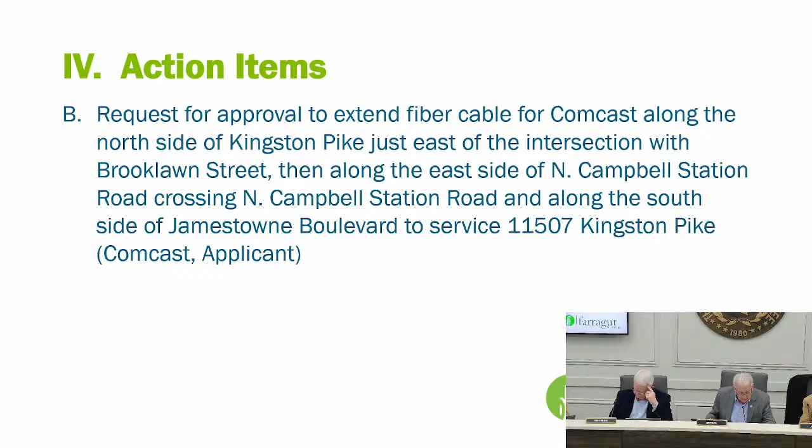Comcast applicant. Yeah, this fiber project was actually mostly approved at the June Planning Commission meeting, but Comcast wanted an additional section along Kingston Pike, and that required TDOT's approval, so they had to go through TDOT to get that section approved. That's what they're requesting tonight: to amend that original approved plan to include the section along Kingston Pike, which starts just to the east of the intersection of Kingston Pike and Brooklawn Street.

Then the fiber would be installed in a new 2-inch conduit that would be bored under Kingston Pike from Brooklawn, and then on the north side of Kingston Pike, all the way down to the eastern intersection with North Campbell Station Road. Then it'll go north along North Campbell Station Road and cross under it to the intersection with Jamestowne Boulevard, and run along 900 feet of Jamestowne Boulevard, and then into the Village Green Shopping Center to service 11507 Kingston Pike.

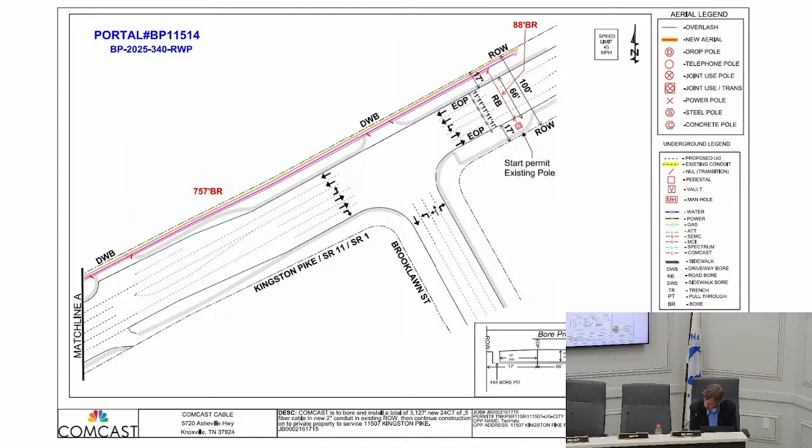The applicant has obtained approval from TDOT, and the staff is recommending approval of this fiber extension, subject to obtaining a right-of-way permit from the town's engineering department.

Okay, need a motion? Move to approve. Second.

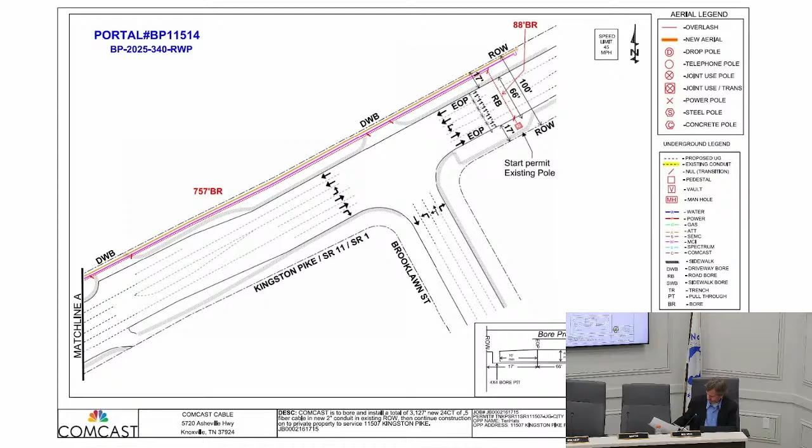All right, are there any citizens signed up for this? No, sir. Is there a representative present? Okay, any comments or questions from the commissioners? None.

I think we need to make sure that the motion has a subject to. The motion was subject to that. Okay, just want to make sure. If there's no further questions or comments, we have a motion and a second.

All in favor of the motion, say yes. Yes. Opposed?

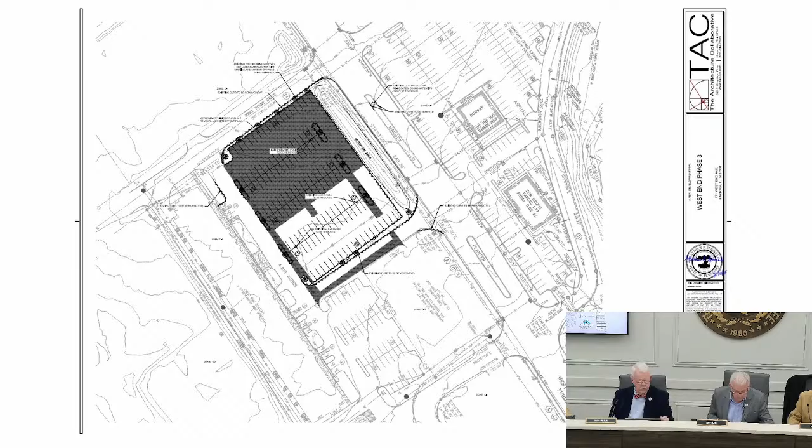This item was postponed at the November meeting. They were working on some stormwater plans. It involves a proposed 9,600 square foot building at the south intersection of West Point Drive and West End Avenue. This is the existing conditions, and the shaded area shows the parts of the parking lot that would be modified to accommodate the building and other proposed changes.

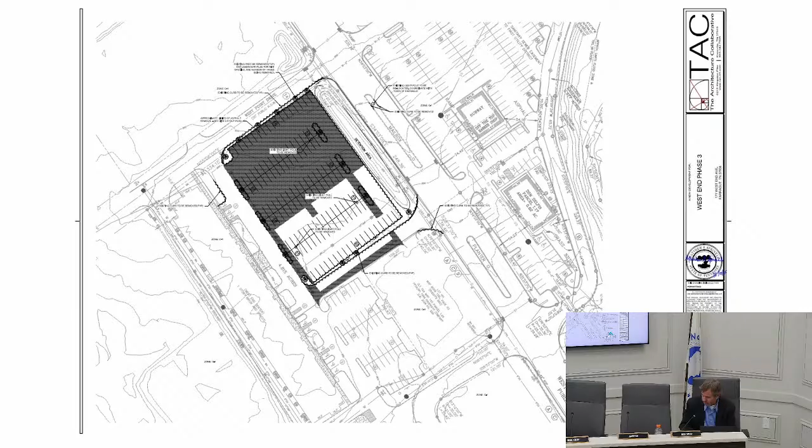There's an existing detention basin along West End Avenue, and with their current proposal, they're proposing some underground detention in that area.

The beige color is where the proposed building would be situated, up close to West Point Drive. They did not want to put the building along West End Avenue because it would block the tenants in the existing West End Center.

If you remember, when we updated our land use plan back in 2012, there were illustrations of different parts of the mixed-use town center, some concepts. One of those was for the West End Center to have what's called these liner buildings, brought up closer to the street to line it. So that's consistent with our comprehensive land use plan and helps advance that design concept.

They also have, as you all know, an amendment going through the Board of Mayor and Alderman dealing with the brick requirements, based on the standards in the architectural design standards, allowing them to average the 4 elevations with at least 75% face brick.

So the staff has reviewed this. I'm just going to show some other images here. This is an expanded view of the detention along West End Avenue.

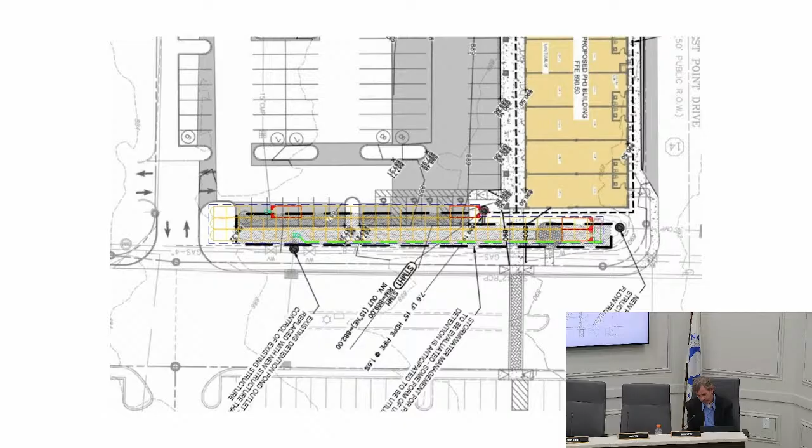The building's south elevation faces the existing West End Center, or kind of corners it. They're trying to match that architecturally, and that's one of the reasons for their original amendment to the current requirements in the zoning ordinance for face brick on all 4 elevations.

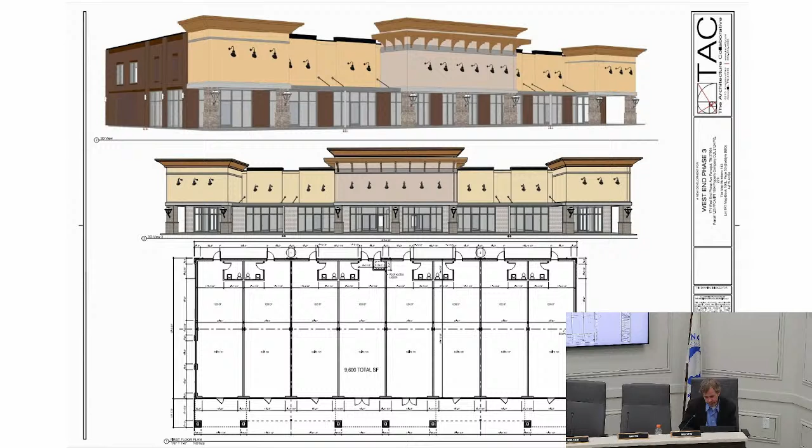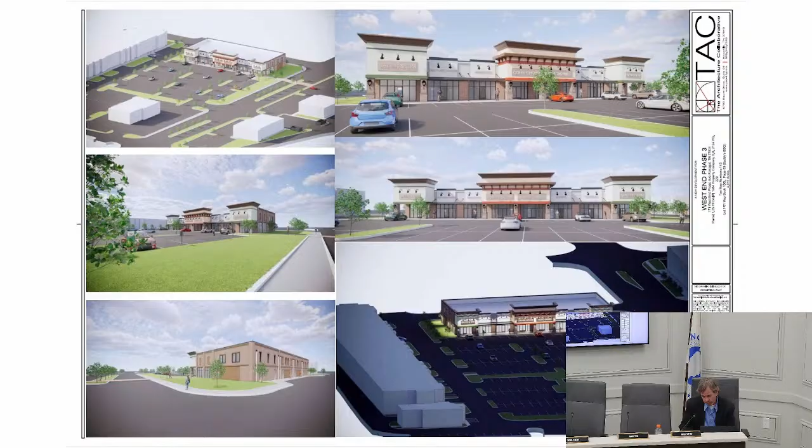So that elevation is the one that doesn't currently meet the face brick requirements, but all the other 3 elevations are almost 100% face brick. If you average the 4, as would be in the text amendment if that passes through the board, this building would be in compliance, because it averages to at least 75% face brick.

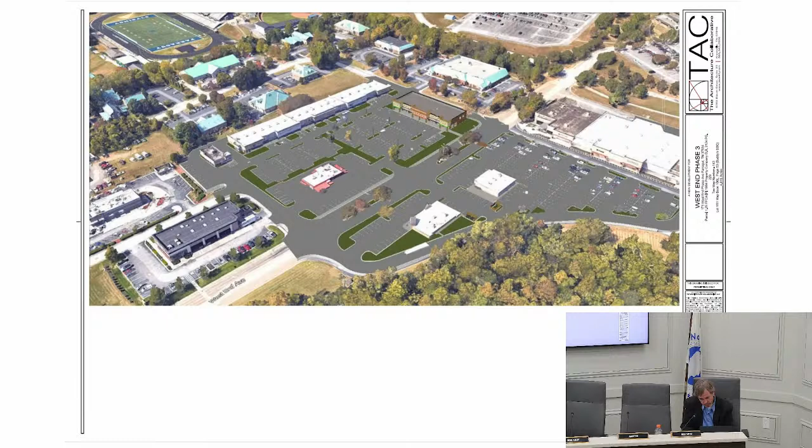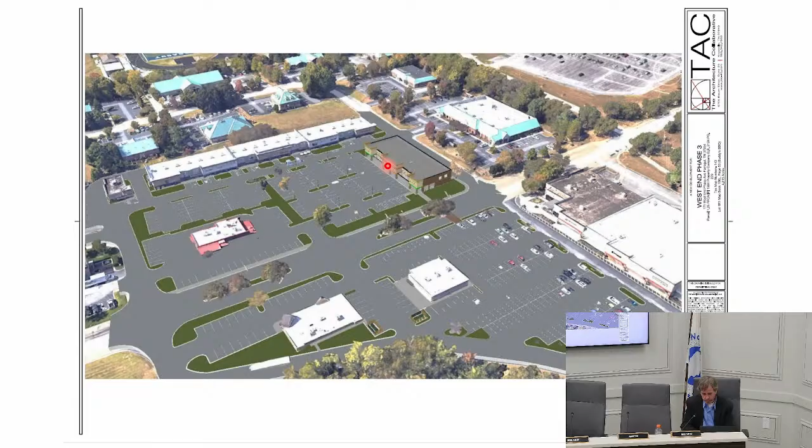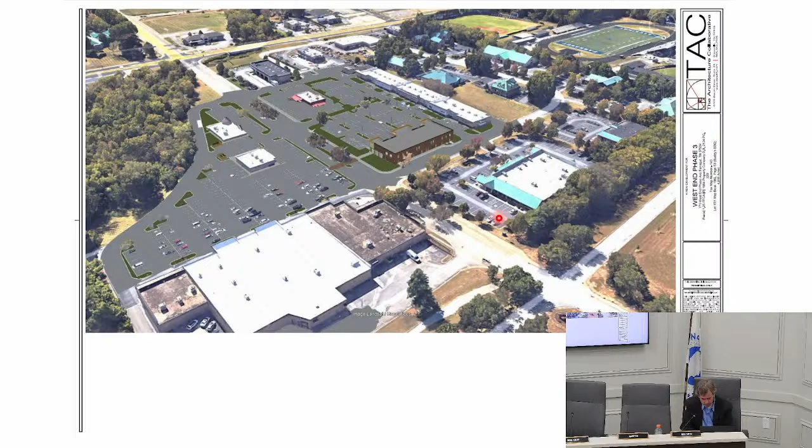These are some other images of the building, including an aerial showing where it is situated. This is the building here, and the existing West End Center is here. That's what it looks like from that perspective, and here are some different views of the building from different angles.

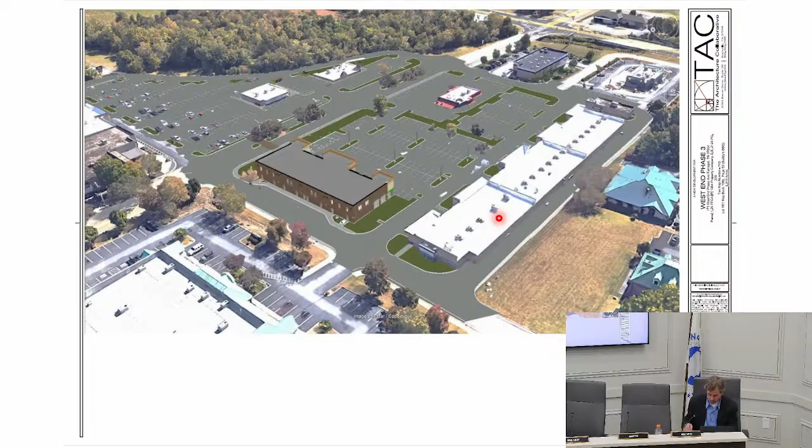Staff is recommending approval of this site plan, with some subject-tos. One of those was consideration of adding a sidewalk.

The dumpster is in a bit of a circuitous location, over here. There's an existing sidewalk, so the request was to add a sidewalk to access that dumpster if they're going to keep it there. Otherwise, whoever is taking the trash out will be in the street. So that's one of the recommendations.

Highlighting the landscaped area between the building and parking lot, that's actually a site plan requirement. It would need to be reflected on the landscape plan as well, which they will need to provide, and that's another one of the subject-tos.

The tree preservation plan is also part of the site plan, identifying the trees being removed, which will then be carried over and reflected as replacement trees on the landscape plan.

On the architectural sheets, just clarifying that masonry is face brick in relation to this building, because that is the requirement in the mixed-use town center.

The utility plan needs to show the transformer locations and other utility structures, especially given how close the building is to the street. The lighting sheets need minor adjustments and clarifications, listing out the foot candle readings along the property lines, including a column for the Kelvin temperature of the different light fixtures, and noting that the mounting height for wall fixtures cannot exceed 15 feet.

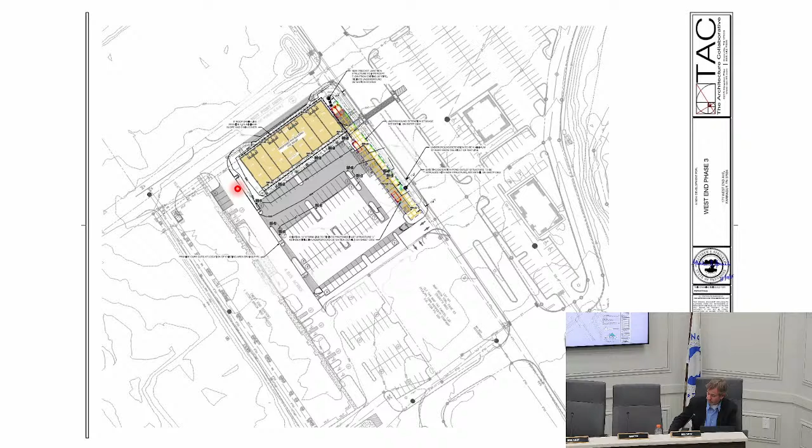And then obviously the text amendment would need to pass through dealing with the architectural design standards, as far as the face brick, because that's what they're showing on this site plan. But it was unanimously recommended for approval by the planning commission and is recommended for approval by the staff as well. So that's the subject-tos for this.

Does anybody have any questions about those or the project?

Motion to approve with the subject-tos. Second motion. All right, thank you.

First of all, do we have any citizens signed up? No, sir. And we have representatives here.

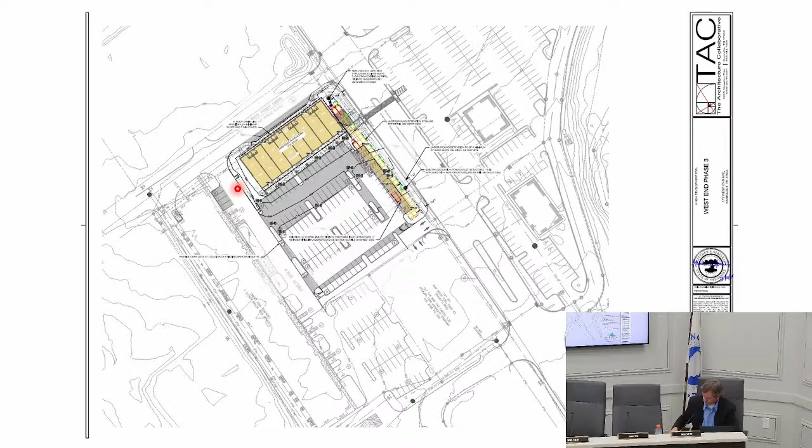Would someone like to come up to the microphone? We have a few questions we probably want to ask. If you would, turn on the mic and give us your name and address.

Thank you. My name is Matt Sprinkle, 631 Carch Drive, Maryville, Tennessee.

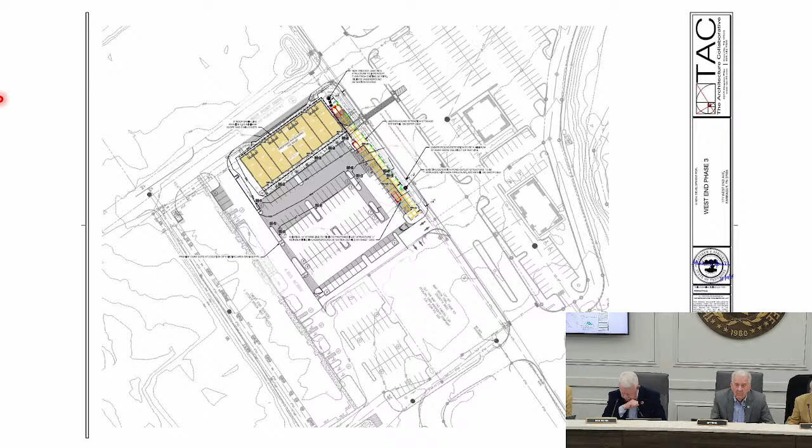Okay, anything you want to add before we come up with questions? No, I think Mark covered it well. Yeah, I just wanted to say I appreciate the assistance they've given us through this process.

And as Mark mentioned, depending on the item on the agenda later on, we'll want some clarification on how that might impact us and what kind of steps we may need to take to accommodate that, but...

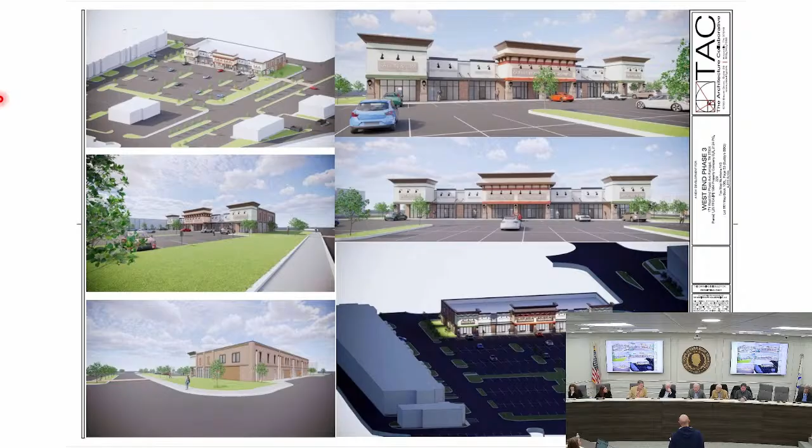Okay, I have a question. It has to do with the dumpster. I'm a little concerned where that dumpster is being located. You've got 8 bays there, and you may have 3, 4, 5 different tenants.

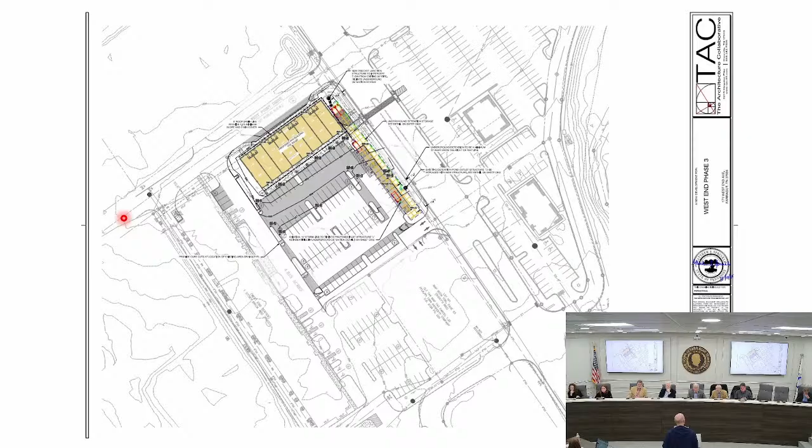They're gonna have to walk all the way down across that street and around the corner. I was just wondering, is it possible, in my opinion, maybe to put the dumpster at the west end of the building that you're building currently? Is there room? I know aesthetically you don't want a dumpster there.

But I was thinking maybe you could enclose it, landscape somehow. Yeah, that's gonna probably be a nice area. I think the sidewalk is a good idea that we'll look at to improve the access for the tenants to the dumpster. And as Mark said, we don't want the employees walking on the street out there, so yeah, right, I think the sidewalk's a good idea.

Yeah, I mean, it was just a thought. Yeah, it's a good thought. It's a trade-off between the nice aesthetics, that open area there next to the site, and the distance. So yeah, it'd be something that the tenants and the owners will consider.

I'm thinking of bad weather, rain or whatever. Yeah, that's true. So, any other questions, comments?

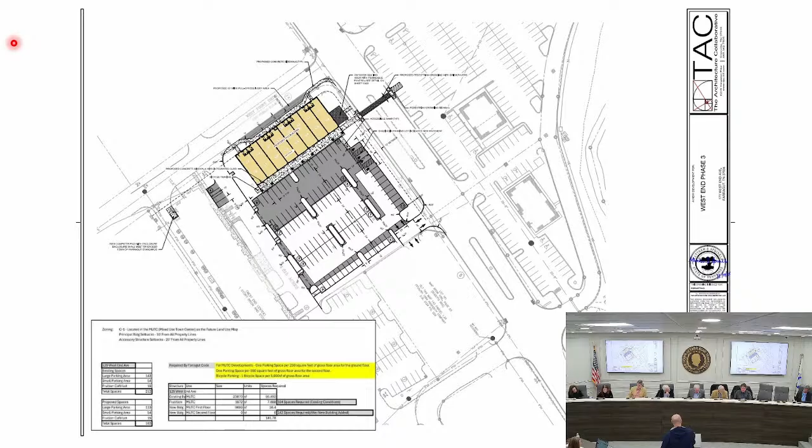All right, we have a motion and a second. Let me ask, does the motion include the subject twos? Is item 9 a subject two or not? I'm a little confused on that. We have an alert that if things change, this property could potentially qualify because it does directly abut Turkey Creek, but that's a couple months off at least.

Before that goes through the process, does it really need to come back to us, Mark, or do we need to come back to you all for an ordinance? We just have it as a workshop item tonight. Yeah, I understand, but I meant the site plan. That's up to you all.

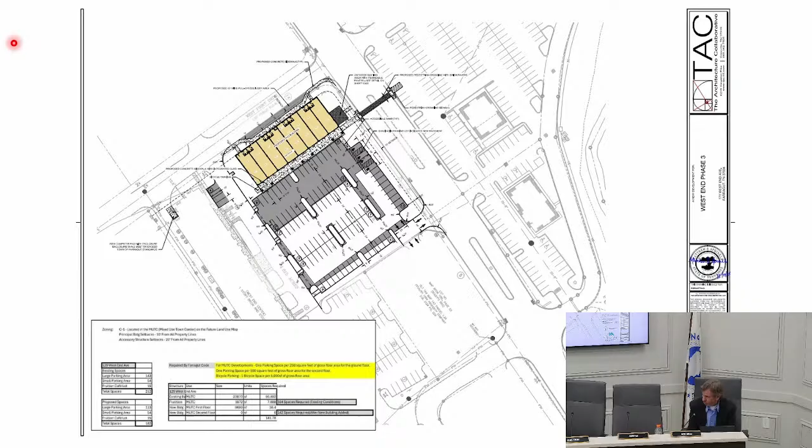From my perspective, if it's not a material change you would notice, since the detention as proposed is underground, I'd be fine with that if you all are okay with it, or if we see a notable change we'd bring it back to you. If you want to give us the ability to make that call, that's up to you all. I'm fine with staff review on that. Same here, I agree.

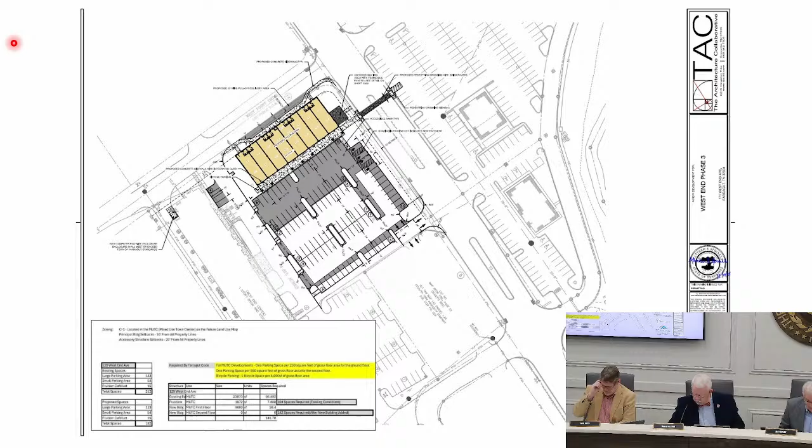Okay, so we're okay on the motion? We got it. All right, we have a motion and a second. All in favor of the motion, say yes. Yes. Opposed?

Nothing showing up on my screen. Did mine. I haven't voted. Yes, please, it's a yes. Motion passes unanimously. Thank you.

All right, moving on. Next item on the agenda is item 4D: discussion and public hearing on the right-of-way improvements associated with the Easy Stop Convenience Market to be constructed outside the town limits at 1064 Concord Road, 4.89 acres, Zone CN, Knox County zoning, Cannon & Cannon applicant.

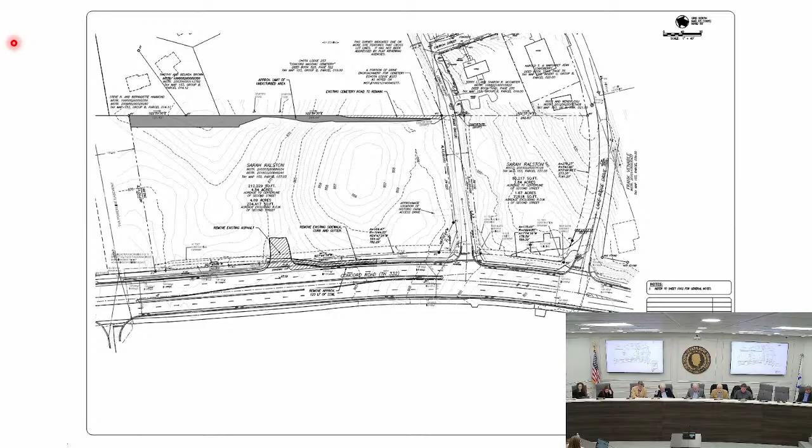This project is similar to one we looked at a few months ago on Outlet Drive, where the development itself was not in the town limits, but modifications were proposed that involved the town's right-of-way. Concord Road is a state route, but the entire right-of-way is in the town of Farragut, so work in the right-of-way requires approval from the town's planning commission. That's why it's here before you.

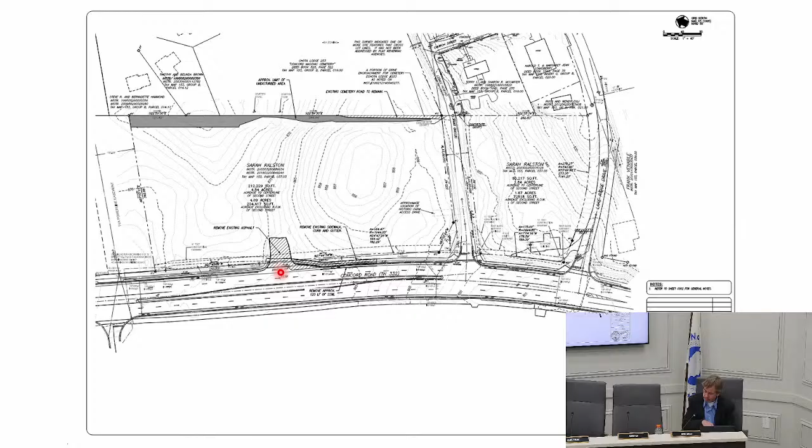This is an existing shot of the property as it currently exists, undeveloped. There's an existing access that was created when TDOT improved Concord Road, and that's where the access for this project is proposed, in that same location. There's a short taper out there currently, and what they're proposing is a full deceleration lane.

There's an existing sidewalk along the east side of Concord Road that they'll have to modify to work through their access. This section of Concord Road has a raised median, so their access will be a right in, right out. They have a second access off of Second Street, which is not in the town, and they're tying their sidewalk system into that, which is a good plan.

The majority of what you're reviewing includes the deceleration lane construction and the sidewalk modifications. Staff is recommending approval of the work proposed within the town's right-of-way, subject to obtaining a right-of-way permit from the town's engineering department, TDOT's approval as part of that permit, and providing a letter of credit for $20,000 to ensure any damaged areas are restored to pre-development condition that aren't part of the project.

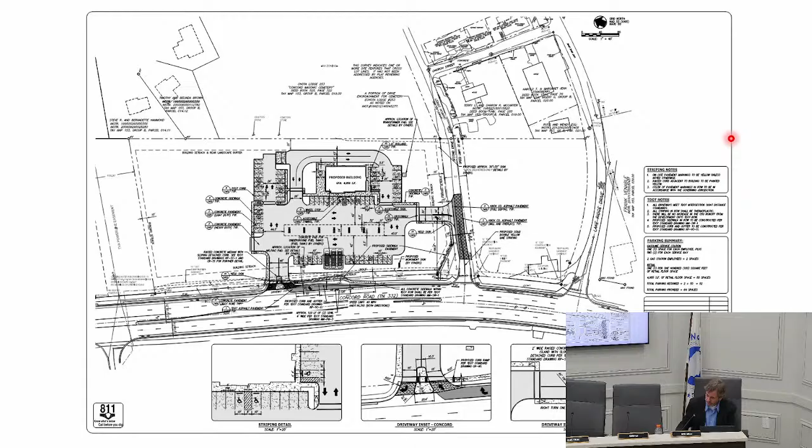If you all have any questions, I'd be happy to answer those. We need a motion? The staff's recommendation was to approve the proposed work in the right-of-way, subject to obtaining a right-of-way permit and providing the letter of credit for $20,000. Motion to approve with the two subject-tos. Need a second? Second. All right, thank you.

I want to speak on that. Okay, citizens first. Do we have any citizens signed up? No, sir. Okay, representative, we got someone here? Yeah, looks like we got a couple. Step up, turn on the microphone, and give us your name and address, please.

Trenton, turn on the microphone. Green? Yep, got it now. All right, thank you, gentlemen. Trenton Langston, 2128 East Broadway, Maryville, Tennessee. Anything you want to add to what Mark's already covered? No, sir, appreciate Mark's comments and the staff's work with Cannon.

One thing I'd like to see: when you reroute the sidewalk around your decel lane, where you have the entrance there, I'd like for that to be marked as a crossing.

In other words, marked across the driveway entrance? Yeah, I think we can do that. There is a median in between there, a raised median. I don't know if you're proposing the markings to go on top of that as well, or just in the paved area. Just in the paved area, so folks will know that that is a cross area. Sure, okay.

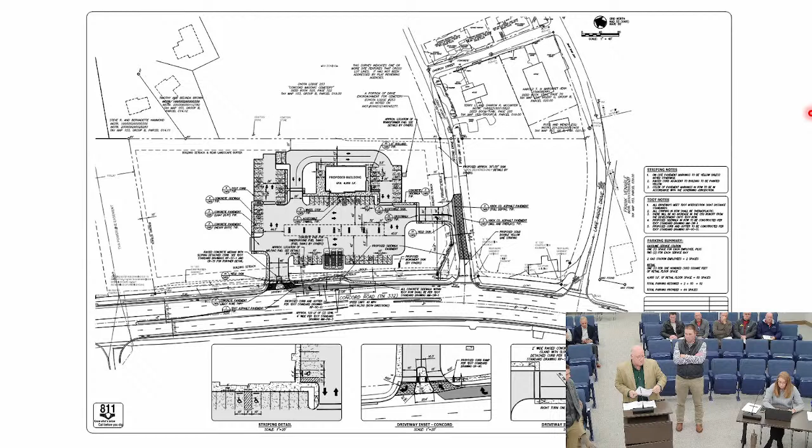Can you delineate it with some marking paint on the pavement? You can do the standard crosswalk, which is just the two bars, or you can do the continental crosswalk, which is what we typically use everywhere in town now. Even if there's no... I don't, usually I think that happens.

Yes, they'll have a stop sign there. Would they have a stop sign coming out of there, or is it a yield? I think they probably should. Do you have a stop sign there? It's not a requirement that there be a crosswalk there, but it can be done. We have a mixture throughout the town. I just wanted clarity on that. I'm thinking about the safety issue, and also the ADA compliance.

Because if TDOT's involved, I'm sure we'll get some sort of direction. Would you give us your name and address? Russ Edens, 10025 Investment Drive.

Just to try to help provide some clarity, I'm showing a delineated crosswalk. It's kind of hard to see. If you look in the middle inset there, I don't have it called out, so it may not be as obvious. And we are in the permitting process with TDOT, and they are requesting a stop bar as well.

Good, thank you. I don't think we need a motion, do we? Covered. Any other comments or questions?

I just want to state this so that there's clarity. All we are controlling is the ingress and the egress to that property. That property is in Knox County. This development is controlled by Knox County.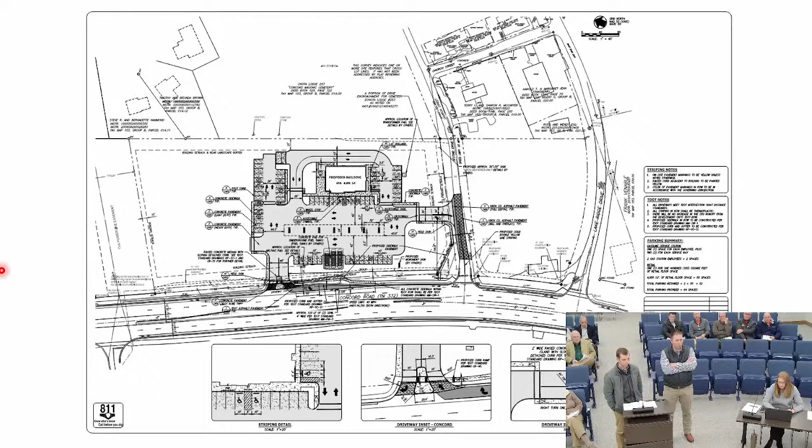I know there was a lot of controversy from the Concord residents, old Concord residents, that they were hoping for something maybe a little bit more historical in nature and feel, because it is an entrance to their historical area, but that overlay that they have does not, I don't think, extend over to the commercial area. So all we have control over right here is the access to the property. We don't have any say over what happens on the property. It's really just the part that's in the town's limits, which is the right-of-way only. And that access, like I said earlier, is already pre-set.

There is another access on Concord Road that will be an issue at some point if somebody ever wants to utilize it, but that's not part of this development.

You're talking about on down to the north? Yeah, north of that. Cross that bridge when we get to it.

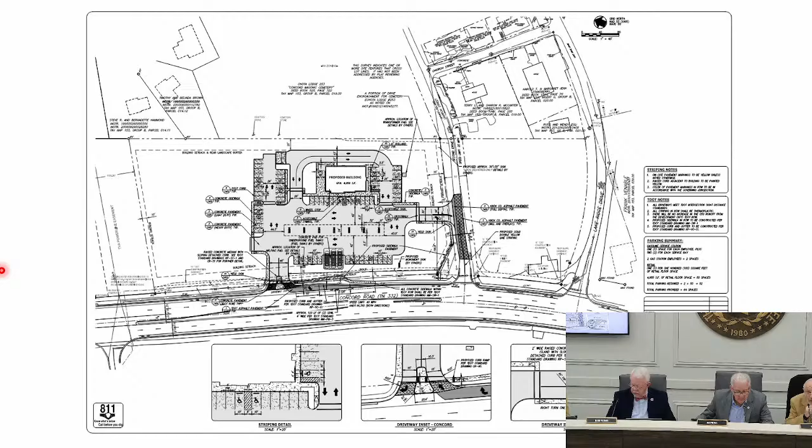Any other comments? All right, if not, we have a motion and a second. Time to vote. All in favor, say yes. Yes. Opposed? Thank you. Motion passes unanimously. Thank you.

All right, we're moving on now to a discussion item: discussion on amendments to the Farragut Code of Ordinances, Chapter 111, Stormwater Management Control, Section 111-7, Design Standards for Detention and/or Retention Ponds, to provide for potential exemptions related to the peak discharge of stormwater in the lower portions of major watersheds.

I was going to just give you the description of the suggested change in a nutshell and turn it over to you, but I've changed my mind. I think I'm going to read what I've got. If you'll bear with me, hopefully my voice can make it through the reading.

This is a text amendment to our stormwater ordinance that allows project development in the lower portions of our watersheds to be exempt from our detention requirements. The wording recognizes the fact that the peak discharge from a large watershed can arrive well after the peak discharge from a downstream development has been released, to the point that eliminating detention is an actual advantage. Of course, the developer would have to submit a hydrologic study showing the lack of detention is indeed an advantage.

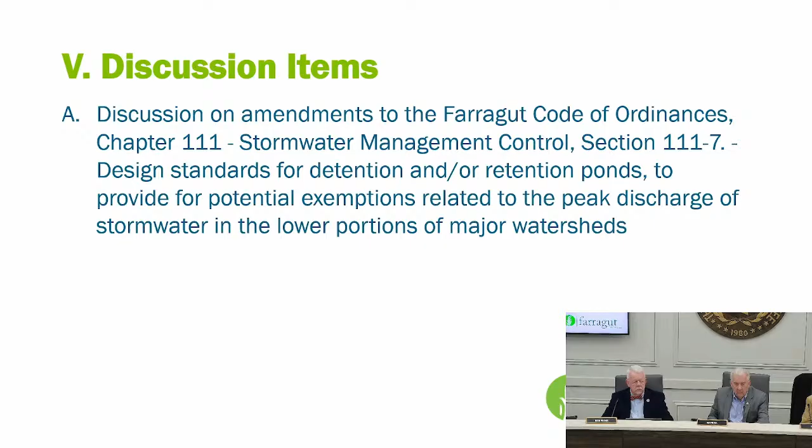Any other comments or questions? All right, I think the city of Knoxville's already got this, if I'm not mistaken. Darrell, you comment on that? I'm sorry, I should have pointed that out. The city of Knoxville has language in their stormwater ordinance covering this. Same with Sevierville, Tri-Cities, Elizabethton. So it's around. Got more water issues than we would ever think about, yeah.